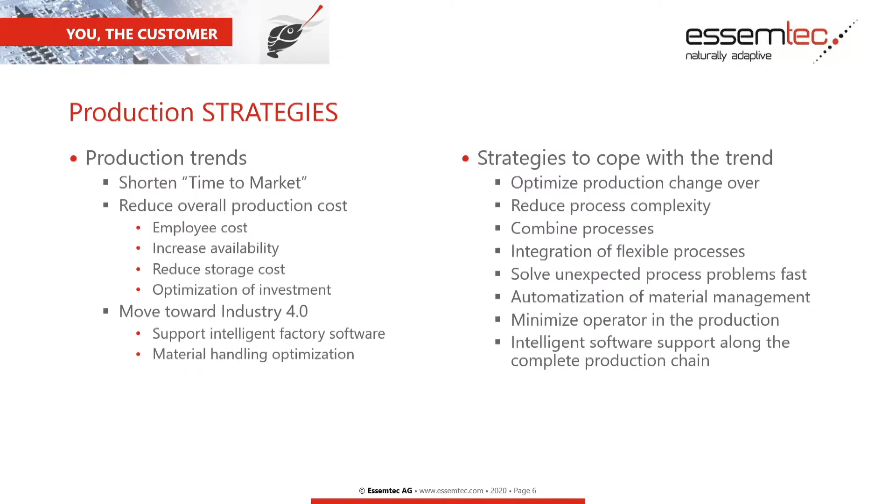Reduce process difficulty - today we still do things by hand, dispensing, etc. In the future that will not be possible anymore. Combine processes together, integration of flexible processes, solve unexpected things. That means in your production, when something happens, you can react much faster than today, and also be ready for future technology which will hit you.

So a partial solution to all of this can be dispensing. Dispensing is part of the solution for this new trend, and we want to talk about that today. What does dispensing bring you in combination with other machines?

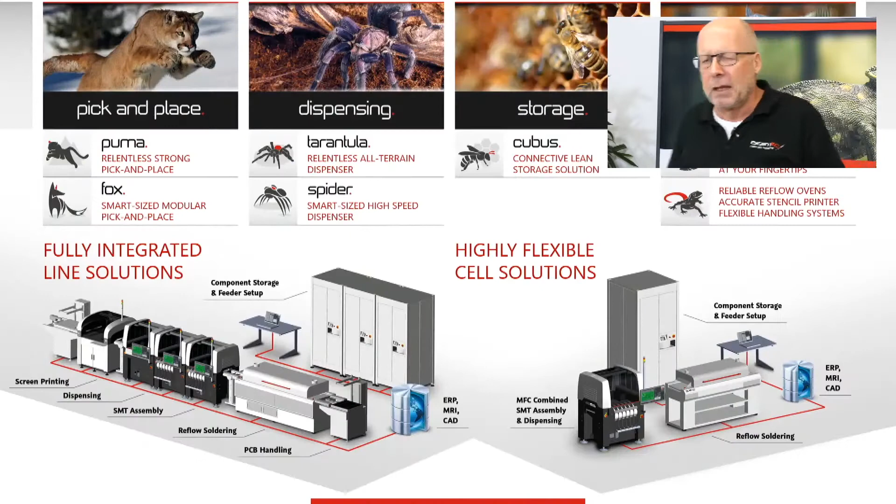Now, on Essemtec, we are actually handling different divisions. One is pick and place, one is dispensing, where we mostly work with very large companies, and of course storage and smart material management, which is a very big issue today. But today we want to talk about something in combination: the pick and place and dispensing combined together, and what it can do for you.

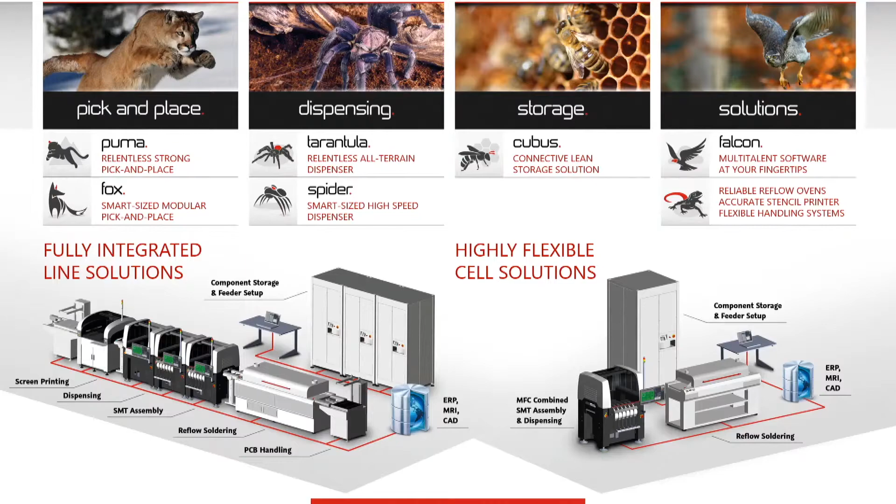We called this concept, this solution, Archerfish. I don't know if you know the archerfish. I didn't know it 6 months ago, but it's an extremely cool fish which actually shoots a jet into trees and bushes to hit down little animals, little spiders, etc. They fall to the ground for eating. This looks very simple when you see it on video, but the accuracy this fish has to achieve is incredible. And this inspired us for our jet dispensers.

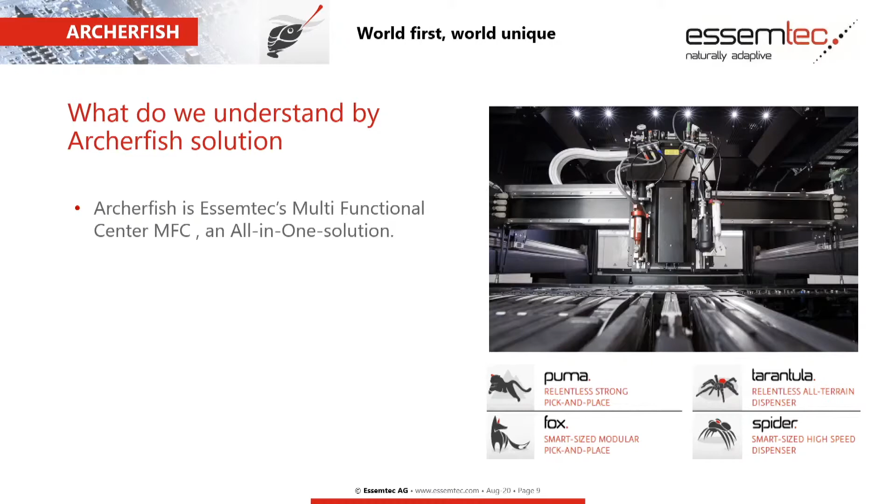So the Archerfish is basically the multifunctional center. Multifunctional means it's an all-in-one solution, meaning processes are combined together. Processes are combined in all our machines. So solder jetting, glue jetting, pick and place, underfill processes, whatsoever, you combine in one machine, or when speed is an issue, you take it apart, but always on the same platform machines.

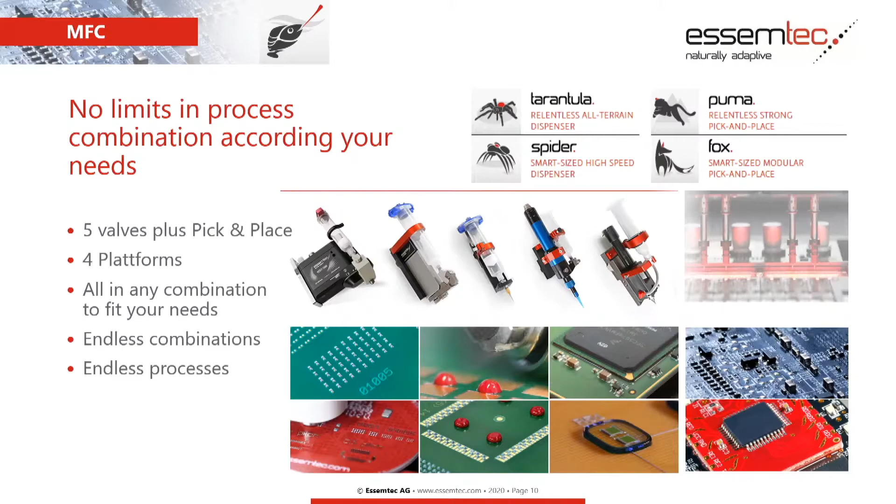Now let's have a look here. Basically, we are working with 5 valves, 4 different platforms, which are technology-wise the same, so that we can do any combination, endless tasks and endless processes. And it's really endless - in the last 6, 7, 8 months we've worked on at least 25 different processes with this tooling, because it's all a question of adaptation.

So what can we do? We are basically having 2 jet valves - one for solder and one for glue. And then we have 3 dispensing valves: one is a screw, one is a volume dispenser, and one is a time pressure, which we are not using much. And what we are covered for is underfill, glob topping, solder, the complete SMD spectrum, etc.

And we combine that together with a pick and place. Now, the question is, where is that used? It's used actually on the whole spectrum of production. We can start with, for example, a simple NPI line - one machine with a jetter valve for solder jet printing.

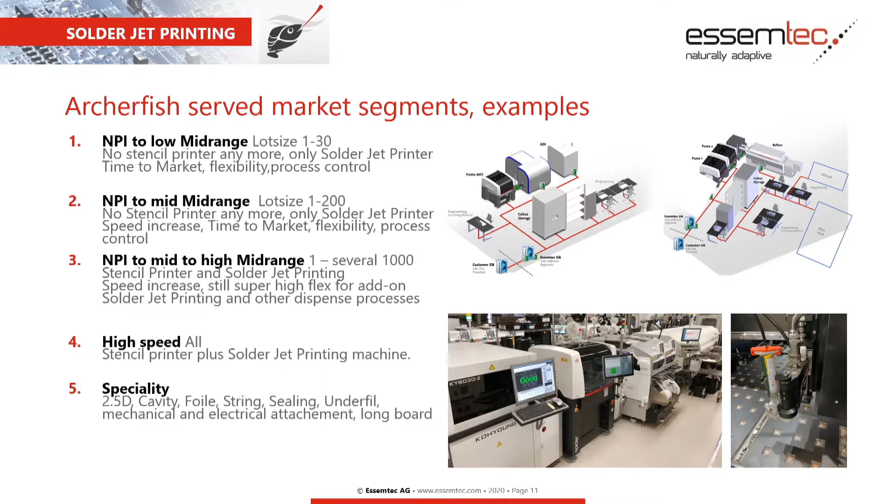And the pick and place, so all in one unit, and for example a vapor phase besides it. Of course this is not fast, but it's highly flexible what you can do. And what we also can do is that an NPI facility can change the valve and use the same machine for other applications they have to do.

Or we have already a little bit more speed. We have a pick and place, in front of it, combined with a jetter. Also there, no printer anymore - all in one.

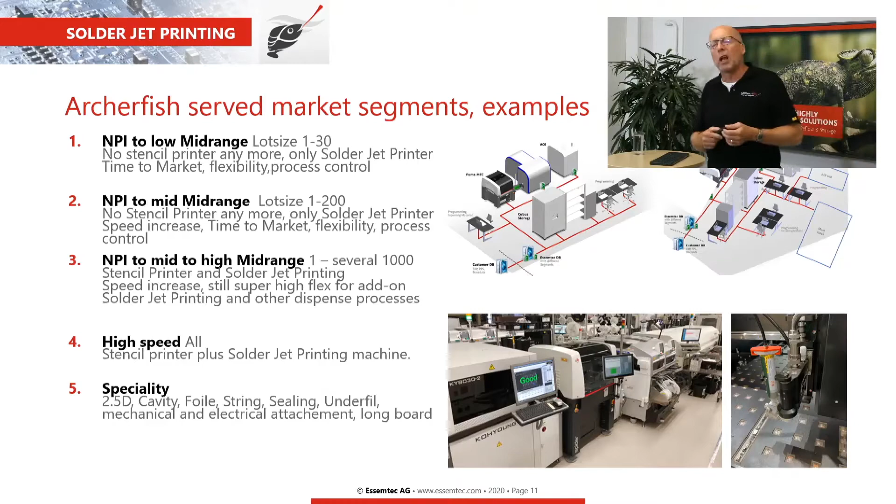Or on a mid-range, speed is higher - you have a mid-range machine, and in front of it you have a jet machine. You see that on the bottom. On the bottom, basically, that's a high-speed line. What we do a lot - I think it's a Fuji NXT in the back, and in front of the Fuji you see our dispense module. In this case, I believe it's in Hungary.

It's a glue application. And the very big thing on this dispensing is specialty. We are not only selling these machines to the electronic market, we're also selling to medical, non-electronic, and other applications which are outside of the electronic market. About specialty, I will talk a little bit later at the end of the session, where I give you one example.

Now, this is basically a head configuration. The Puma machine we will show you today has 3 positions. They can be freely set with dispensing or pick and place heads.

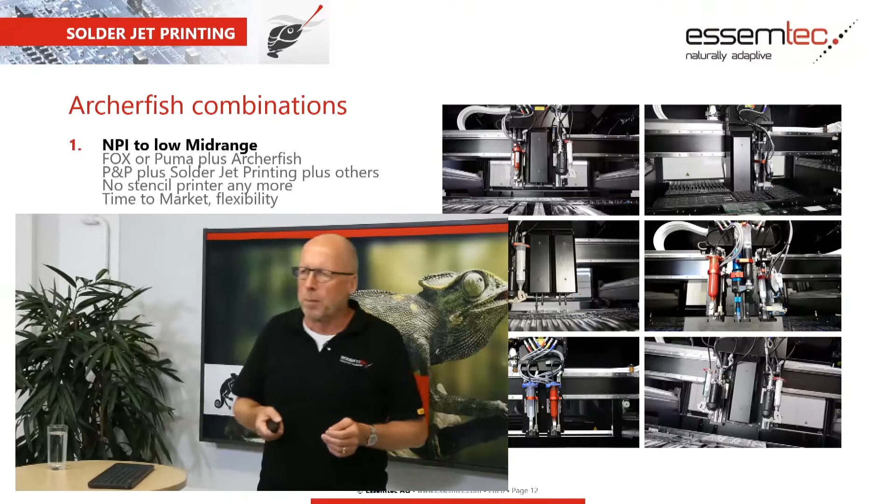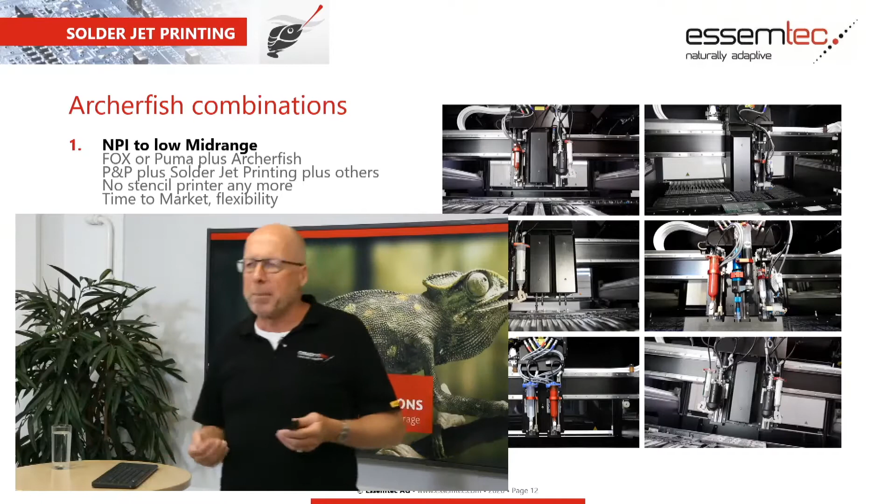So in the front, on the top, you have a typical NPI machine, meaning on the left you have a glue jetter, on the right a solder jet printing head, and in the middle 2 pick and place needles. And on the very bottom you have basically a high-speed jet dispenser with 3 different processes on the same machine. So this machine will be integrated typically in a high-speed line.

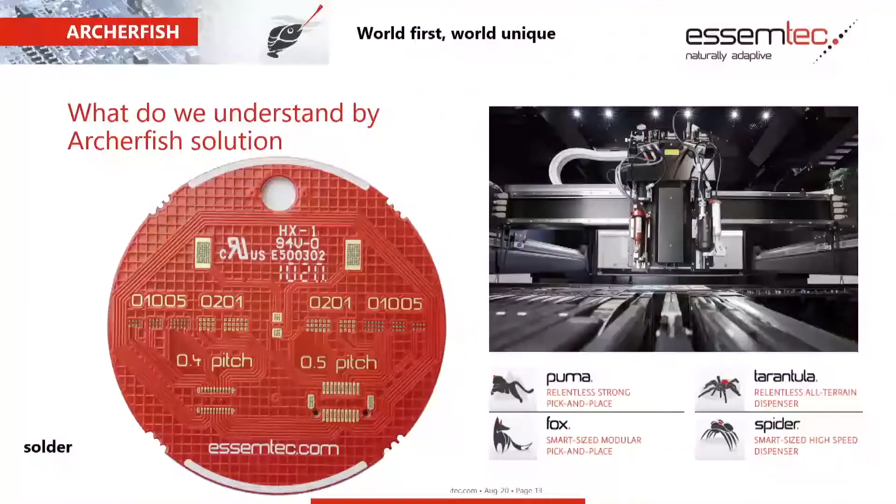Good, so to wrap it up - the first part, you get an empty board, you jet it with solder, you jet it with glue where you need it, hard to see, you pick and place, and your product is basically ready to go into the solder process, into the oven.

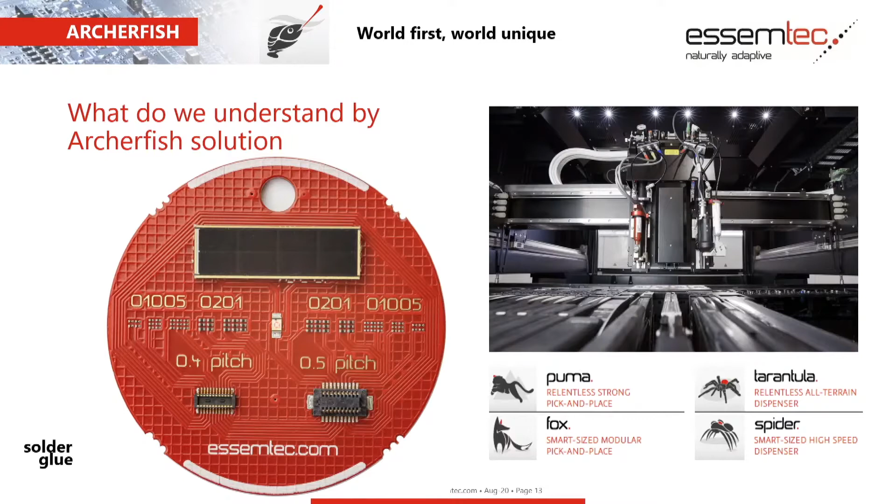Thanks, Jörg. So this is our Puma, and our Puma over here is equipped with two valves. This is equipped with 2 valves. How Jörg was explaining clearly is because that we are going to have 2 different processes. We are going to have a solder process and a dispensing process with glue.

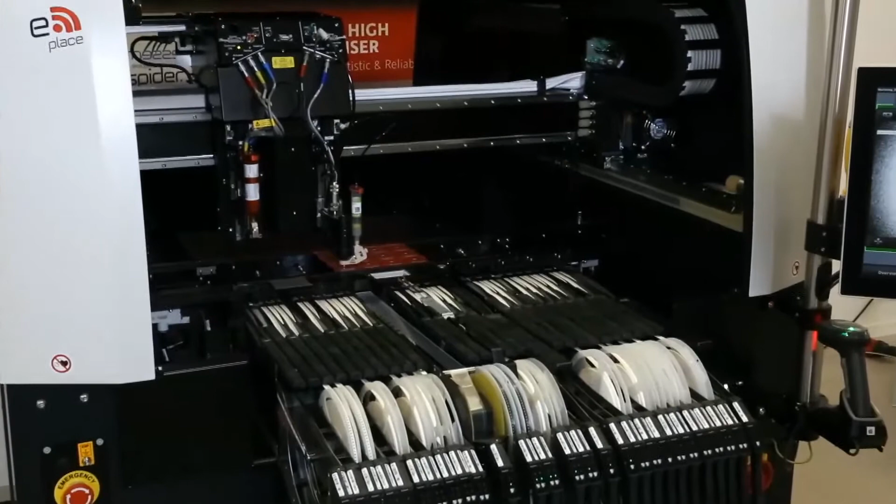So now you can see that the Puma is doing some test dots before we start, measuring the dots and going on action. So right now we have to dispense some small dots and big dots. And the settings that I have over here, it's only for small dot basically, but inside this PCB, what we have over here, we have different kinds of pads, where in this different kind of pads, we need to shoot more dots to simulate the printing process. So we need to put more volume.

So that's why, especially for the solar panel, I will explain later what we are going to place, that on the solar panel we need more volume on this particular pad. So now it's dispensing on the big pads right now. It goes on the 0.5 pitch connector.

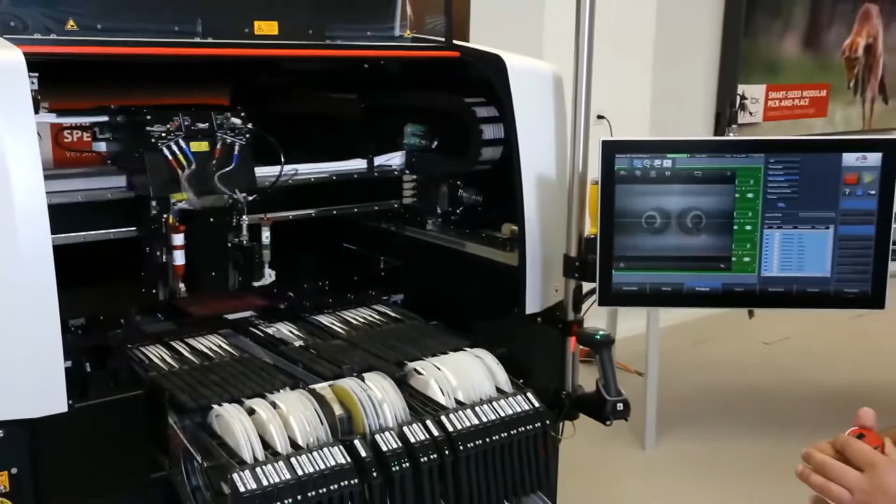Now after the 0.5 pitch it will jump and do the epoxy. Now we'll pick and place the 01005. So we are placing on the 01005. This is the smallest component right now, it's in the market. And as you can see, it's placing them quite nice, the machine. Now we'll place the 0201s.

After the 0201s, we will place the LED and then later on the solar panel. So this is one connector, second connector, LED and the solar panel. So what we have done over here.

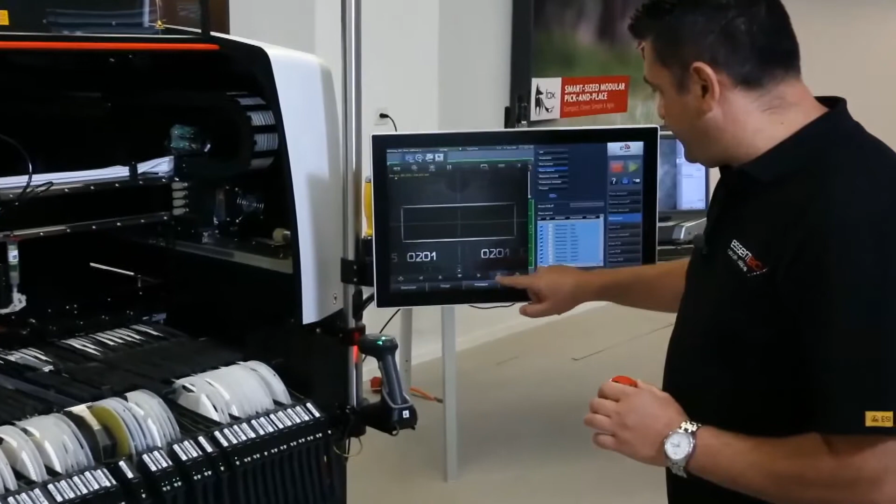So here what we have produced. This is a keychain which we already produced. So here it's the solar panel, where over here we have 01005s. Then there is the LED, which is powered obviously by the solar panel, a connector of 0.5 pitch and a connector of 0.4 pitch. So here you can see that the components are being placed inside our 0.5 pitch, which are here, and 0201s and 01005s, they are over here.

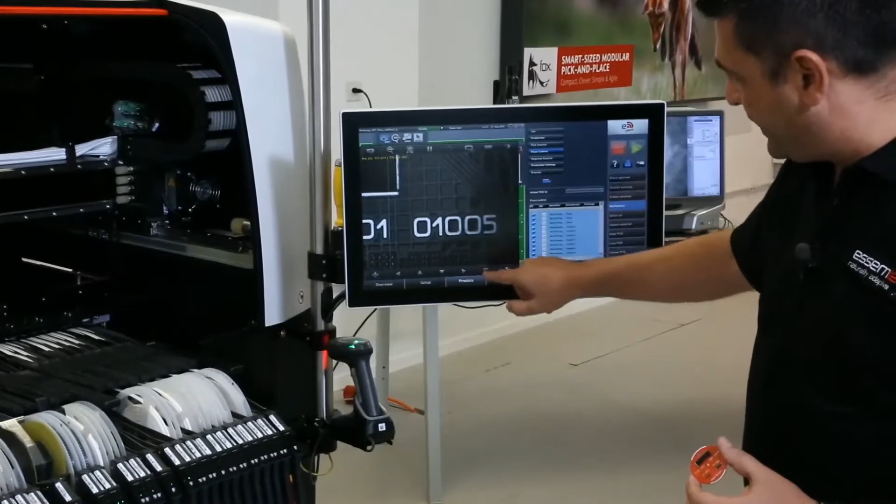So that's what we have placed so far. Now let's show only, because the main showing is on the Archer fish, which is our DST valve. Let's show and dispense only with the dispenser, and later on we will check it under the microscope, because the camera over here with the web camera might not be as visible as good as when we go on a special microscope. So now let's just load for dispensing only.

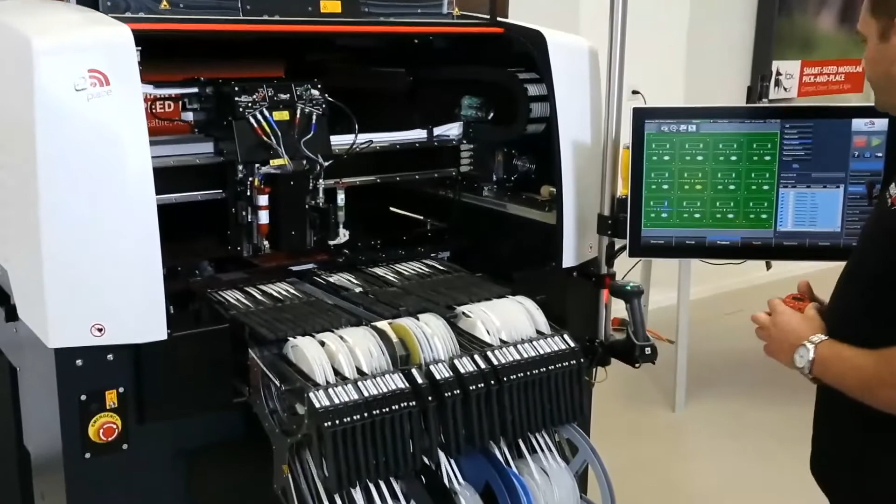Let's take this one. So the machine will do eye points measurements. Once again, it will do a process check before we start. This is the process check. It depends on the end user, so he can switch it on or off. For us, since we're doing a test and showing a test, we're showing that the machine can do a process check as well. This will ensure your quality later on, that your quality will be good as well.

So we are dispensing on the big pads, soon followed by the small pads.

So you see the two processes integrated together. As soon as the DST has been finished, immediately the glue took over to finalize the glue underneath. So when we place big components, it will be attached properly to the PCB. So let's unload our PCB, and we will take it on our microscope to see what we have done so far.

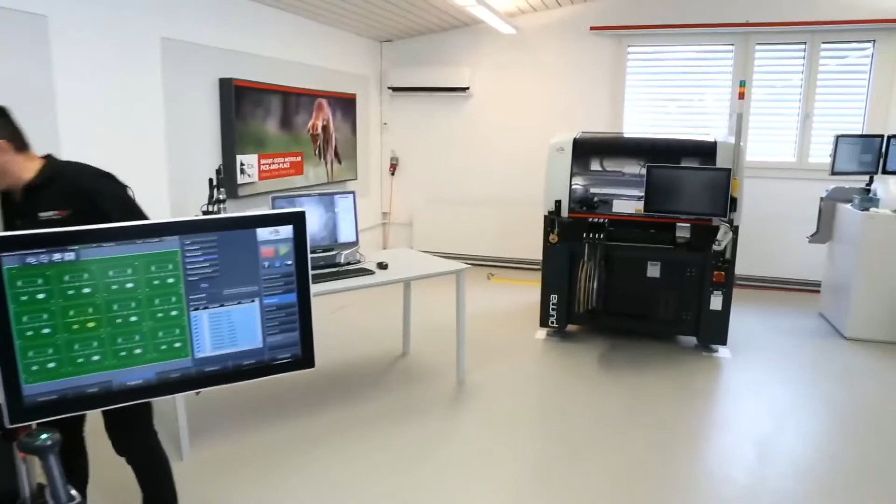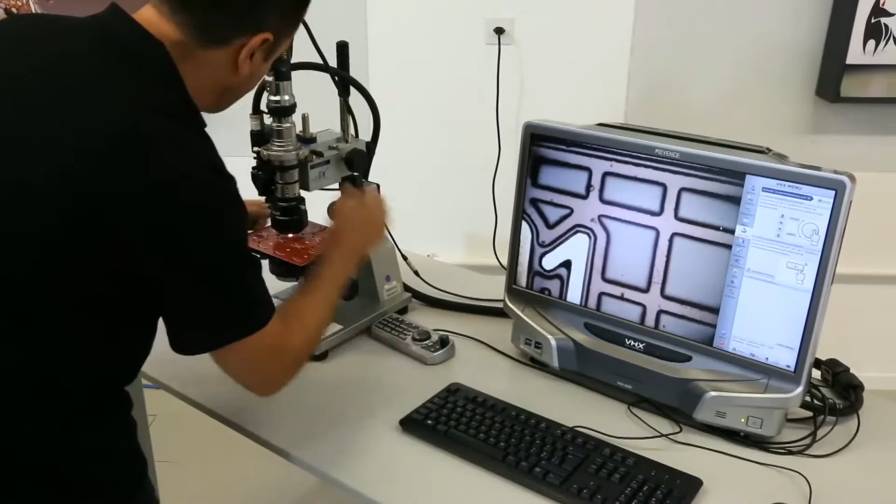Now we go on our microscope. We adjust the angle. So here, yes, we have the dots which are here, what we have produced so far. Let's focus a little bit. So these are the dots. Right, nice.

This is just to show you on the big pads, what we have done. As you can see on the big pads, we did a lot of dots close to each other. So like this, we can fill up a big pad much better. Now we go back.

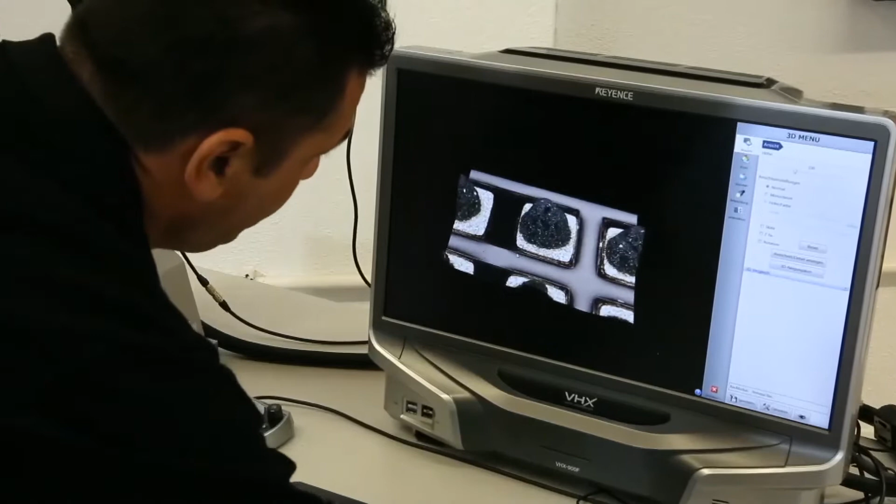Over here, so let's increase the zoom a bit. Let's take a 3D image. Yes, nice. So, as you can see here, it's a 3D image of what we have just dispensed.

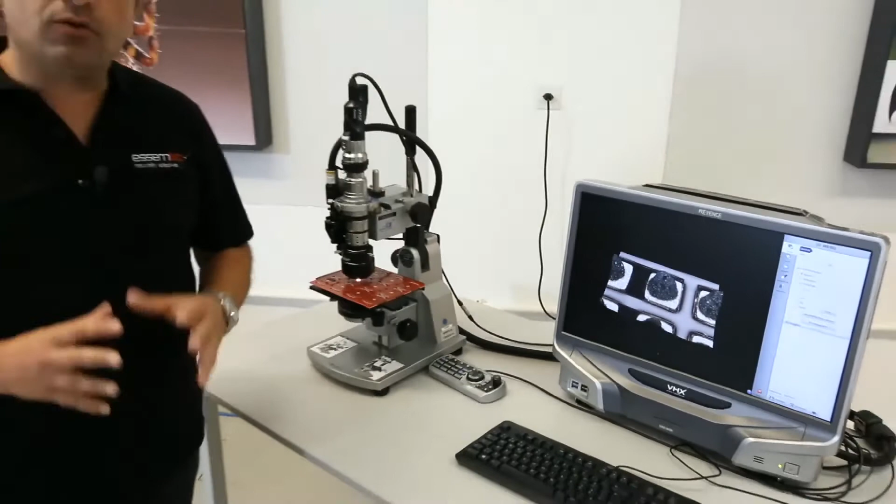This is around 2 to 3 nanoliters of volume over here. And one has to take in consideration that not only dot size is important, it's important as well the volume. The volume is very important, because keep in mind that once the solder goes inside an oven, the flux will be evaporated. So one has to keep in mind that just the volume is very, very important to our process. But here we are showing, which is quite nice process here, nice dot, that we had very nice dots.

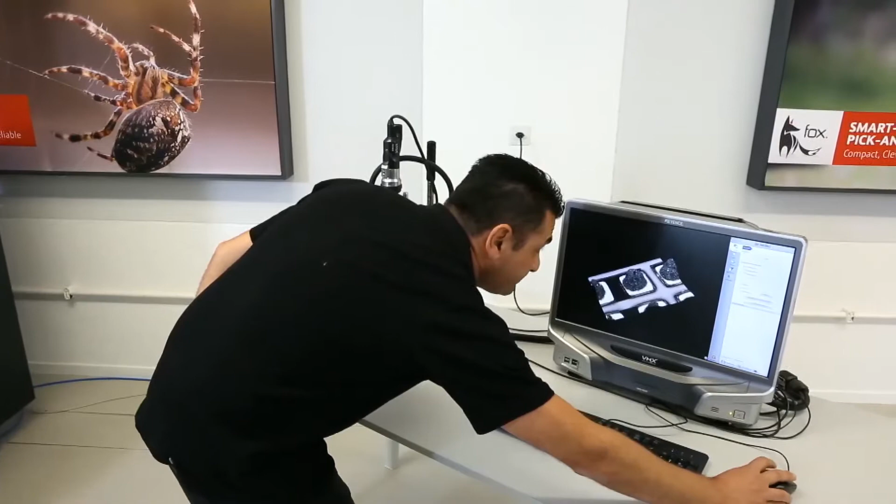And yeah, so let's continue on the machine, to see more capabilities of the machine, actually, what we can do.

And the nice thing, the one that we have done, I don't know whether you can see it, but the LED, it's already powering on over here. I don't know whether you are able to see it because there's less light since we're having spotlights, but it's powering on, which is good. It means our process is quite nice.

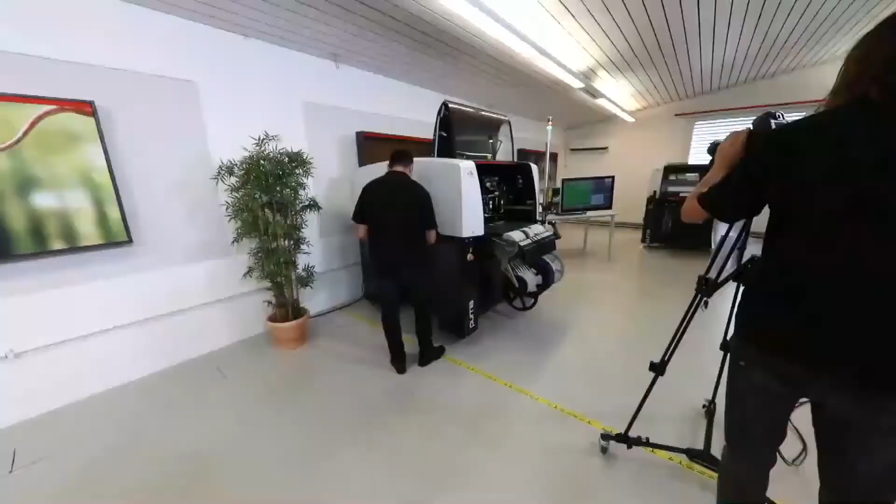So, coming back to my machine. Jörg was explaining clearly as well. Yeah, what we can do more with our machine.

Just to show you as well what we can do, we have the Gerber import. The Gerber import today is commonly used because most customers get files coming with only dispensing processes, where we have introduced our Gerber import directly on the machine. So once the customer has the file, we can just import it on our machine.

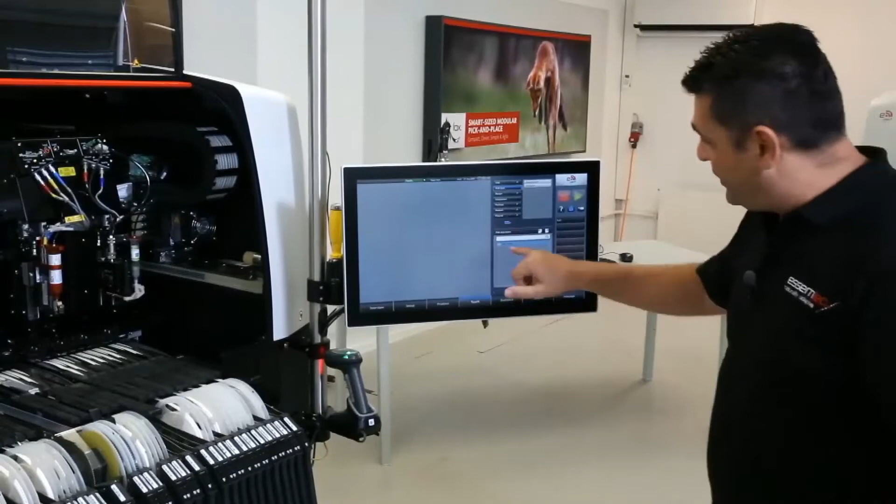I will show how easy it is to import a Gerber file and transfer it to a recipe that later on we can run in production. So let's see how we can do it. Imagine we have a USB or it's on the network, the machine. We have a file, we just load the file on the machine.

Now one has to consider that we have various layers. On a Gerber import, we have various layers, and one has to think which layer needs to go. Normally we will take the top layer. So voila, here it comes. This is our Gerber import and we have the top layer.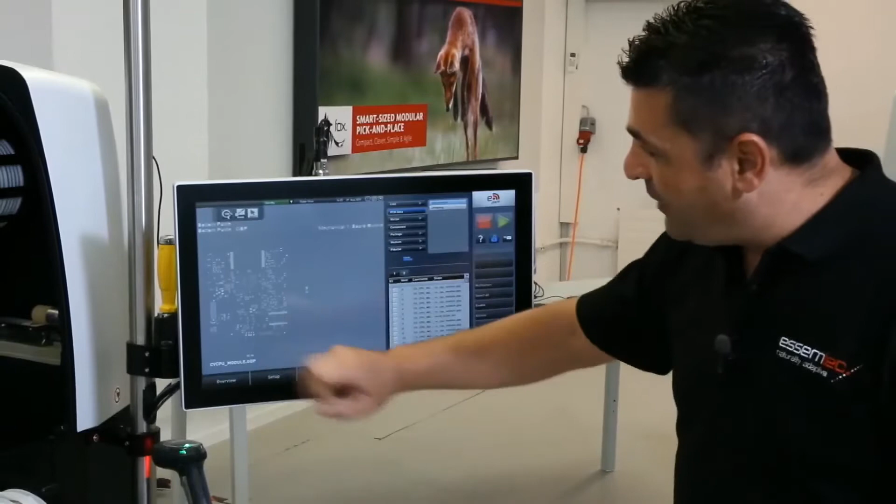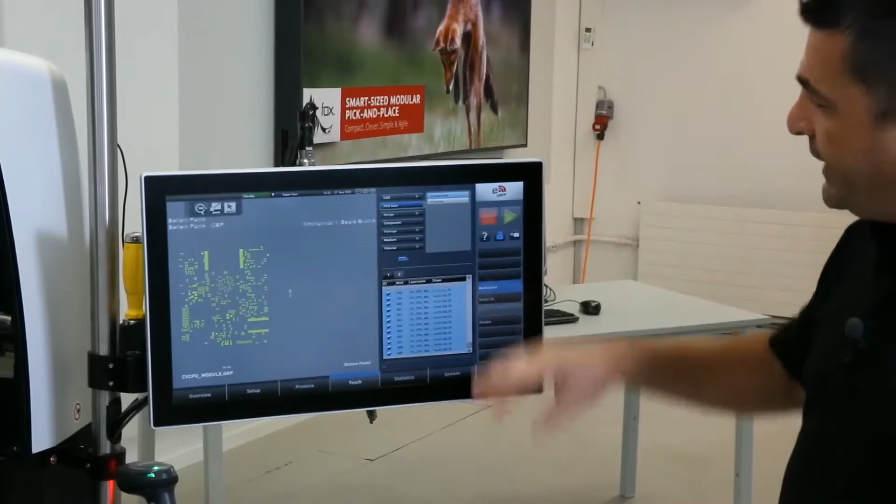Some layers can be defined from here. There will be other different layers. So let's select what we need. Let's assume we take this, because this is our region of interest, and we enable them. Now as soon as I enable them, it means later on we just need to group them.

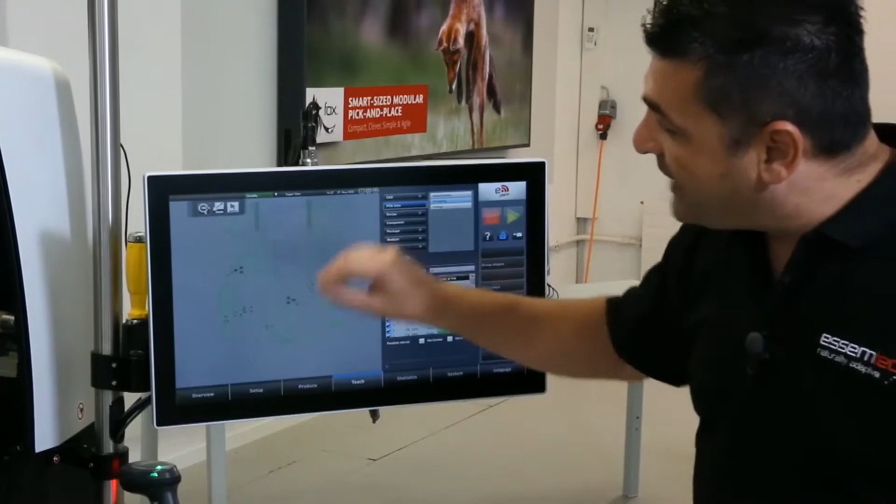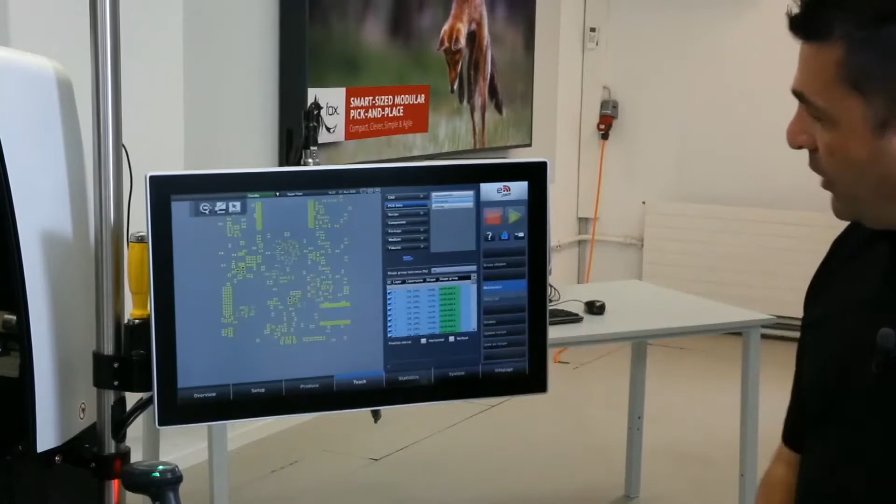As you can see here, we entered another menu where we are going to group different pad sizes right now. So for the machine it will be easier to calculate what kind of dot it needs to put inside. So I will tell it select all, and I will say group shapes. Big shapes go together, and small shapes go together. Then it will be easier for us later on for the filling.

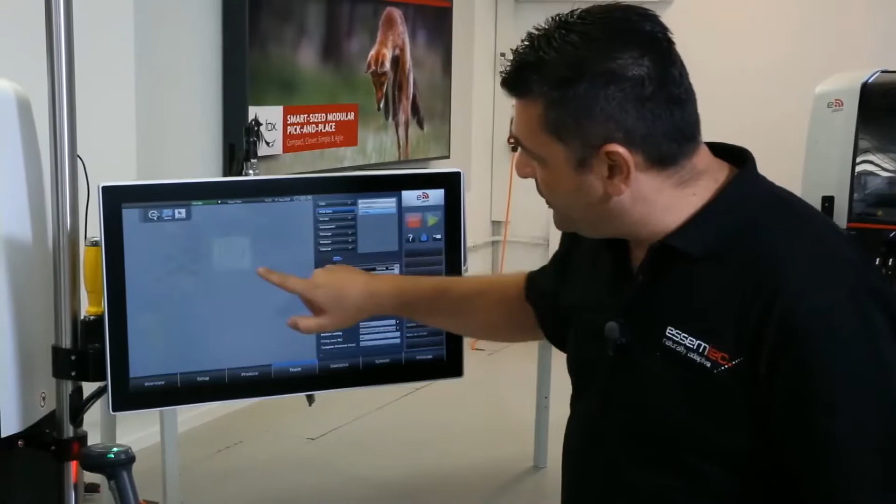So what remained now? Now we have to fill those shapes. So I will select all the shapes and just tell it fill shapes. Wow, good. So now as you can see, the system has filled my shapes, my pads, accordingly.

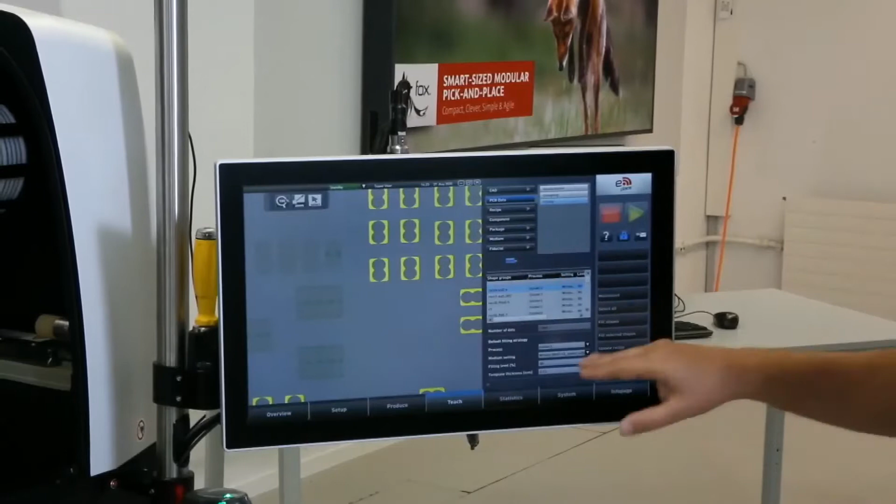So it tries to fill up as much volume as we gave it, to fill the medium needed. As you can see, for example, a bigger pad needs more volume, so it needs more dots inside it.

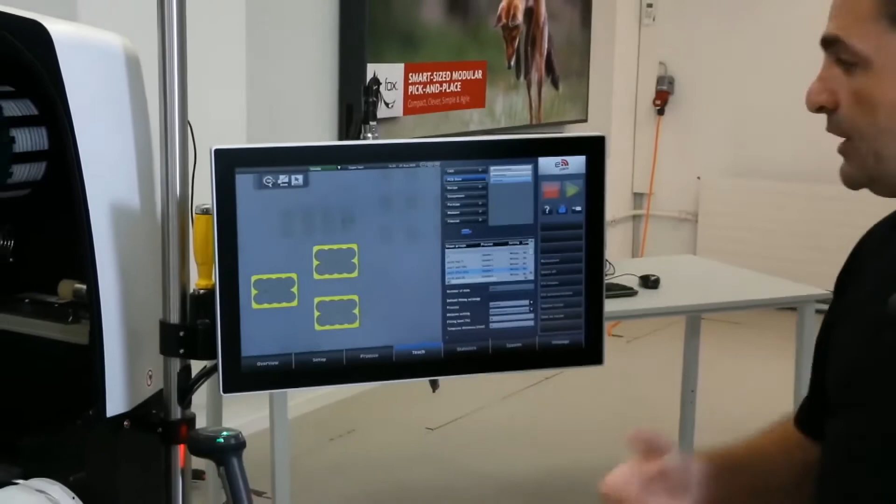Obviously we can do something to make it even faster. Instead of having more dots here, we can have another DST with a larger dot size, and like this we can dispense fewer dots for our application. But let's go now and I will explain how easy it is to change from a 200 micron dot to a 500 micron dot, for example.

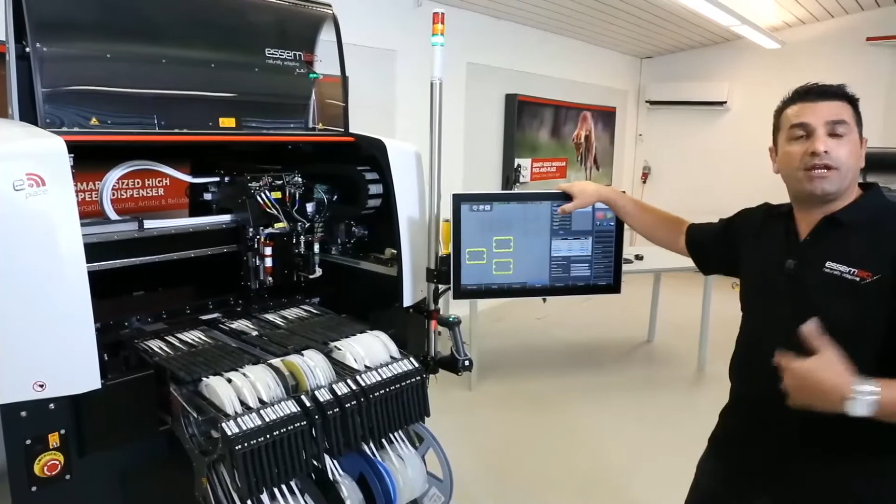So when you have something like this, this is the Gerber import we have done so far. And once I just press save as recipe, then it's ready and we can start our recipe. So Jörg, if you can pass me the, oh, thank you. As I was explaining, we just bring the machine off.

So this is the DST, what we mentioned. It's easy to change the fluidic. You remember before I told you that when you have a big dot or a small dot, you cannot run them together. What you have to do is sometimes you need to change the fluidic part. It depends - this one, for example, can take a dot from 200 to 400 micron. But if you need a 500 to 700 micron dot, you need a different fluidic system.

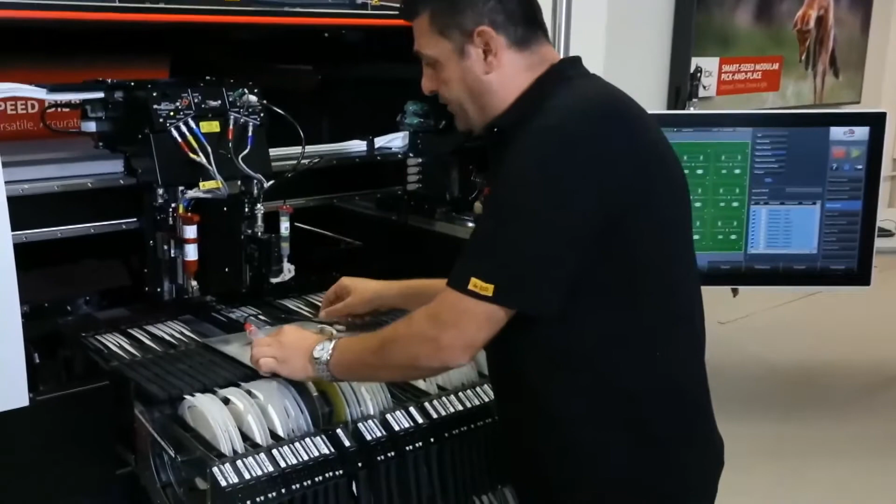And this is all what you need, and it's very easy. For example, this is to change the fluidic to a 500 micron dot. So it's easy, no tools required.

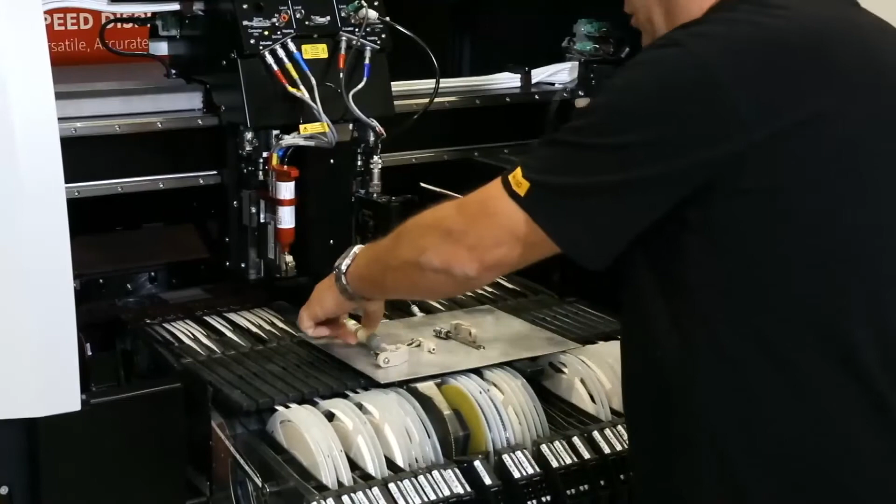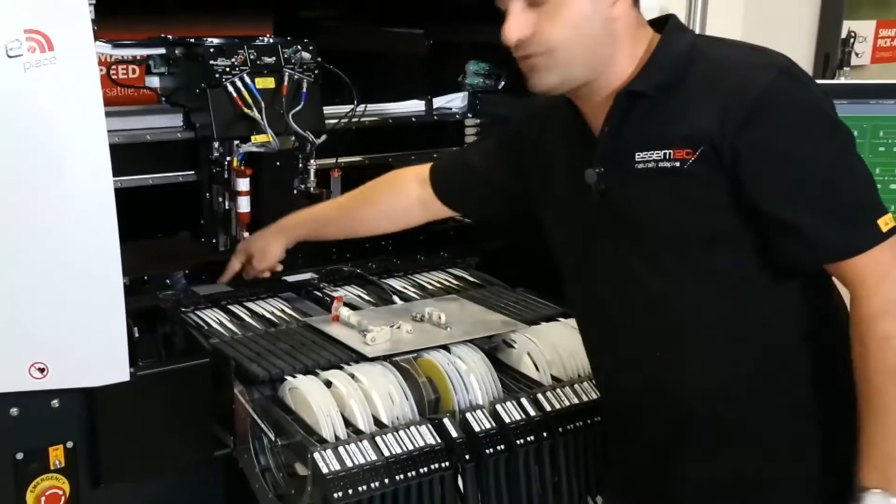So we just take the medium and it's out. Everything is on quick release, so it's on a special bayonet. Put the new one in, and it's done. All we need to do, of course, once we have changed the fluidic, is calibrate the Z height, and then we just do a dot over here, which is everything done automatically.

We do a dot over here, where with the crosshair of the camera, we align the dot accordingly. We will show it later on as well.

So let's go back now and change back to our fluidic system. I might need to change back. How easy - pipe out, fluidic out, take the other fluidic, plug in, and ready. Now some people would tell me, oh, but you need to clean it. Yes, you need to clean it, it's true. But don't worry, you don't need to clean a lot of parts.

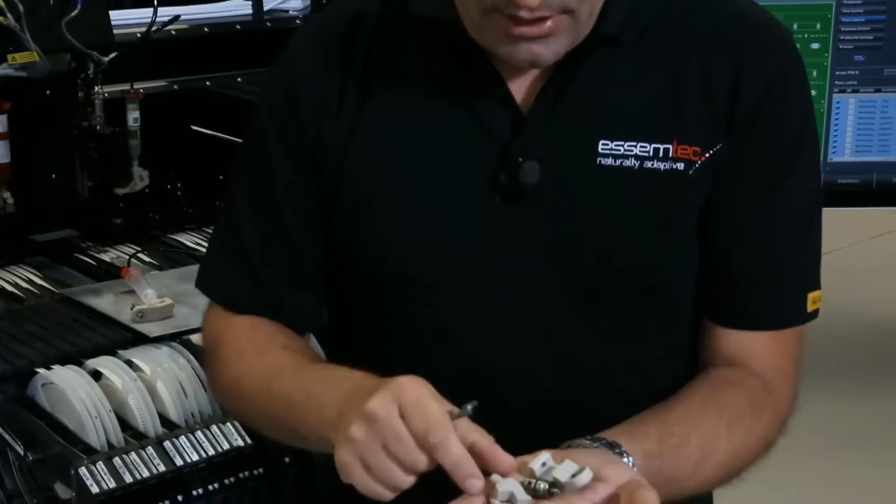This is the only part that you need to clean, actually. Here I prepared some parts which you need to clean. As you can see, with just a simple spanner, these are the parts that we need to clean. This one, we don't need to clean. But these are the parts that we need to clean. It's very easy to dismantle, very easy to clean, because the ports are not so small, and very easy to handle and mount everything back.

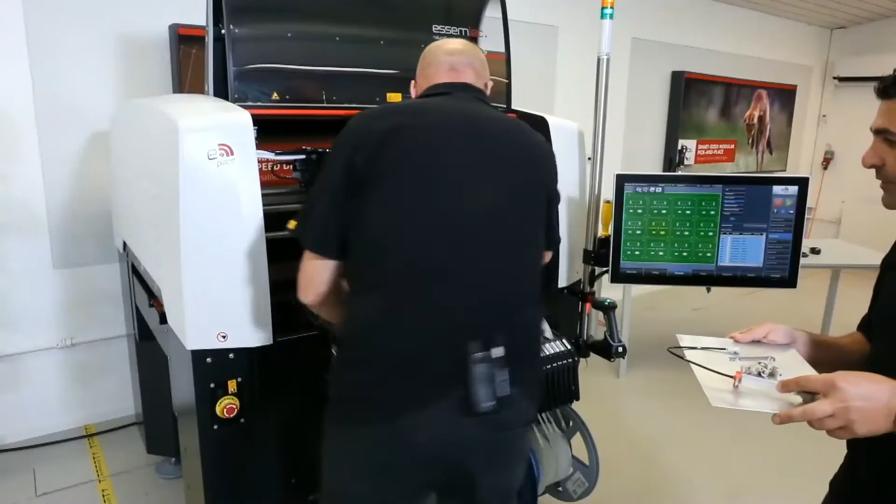So I will pass these a little bit to Jörg first. Now let's show you the capability of our machine, what we can do with it.

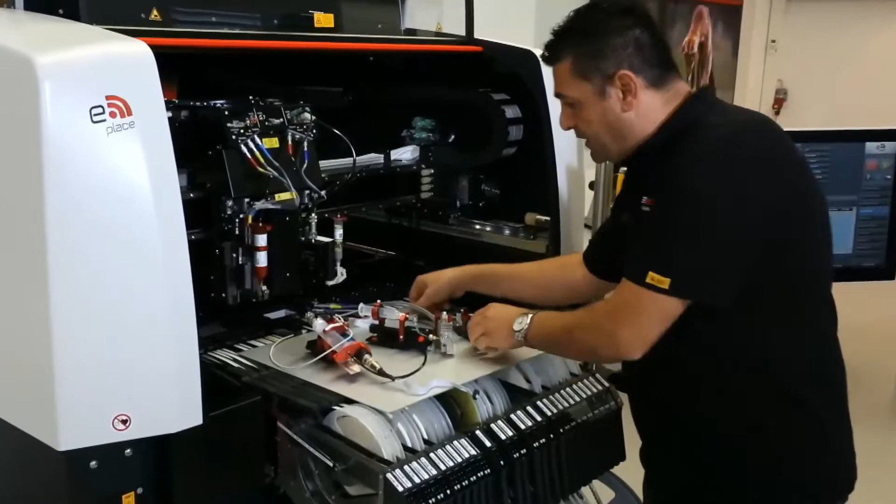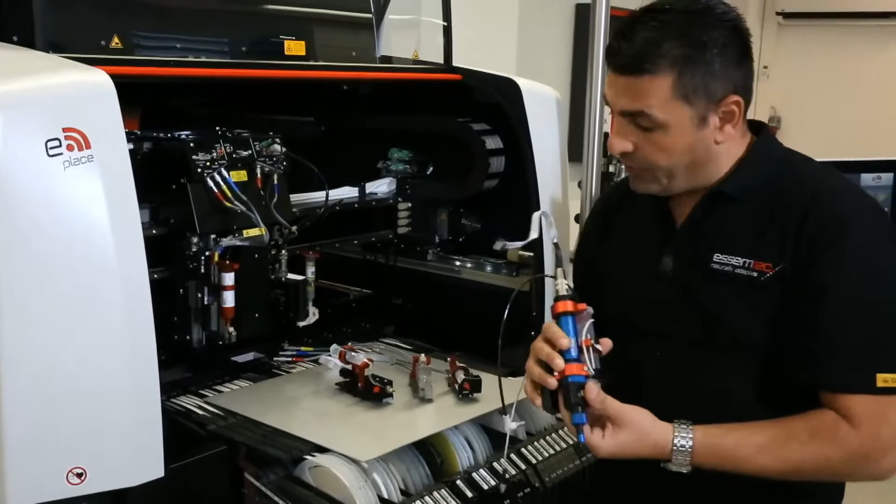As Jörg was explaining, the machine can handle various kinds of valves, and the valves are easily replaced. I'll show later how to replace a valve. For example, this is a time pressure valve, where you can mount on every axis you want. Then we have this one, the high volume valve, good for somebody who wants to do a gasket to seal or underfill or whatever — keep in mind we are not only in the electronics industry. This one is for high volume, sort of a gasket.

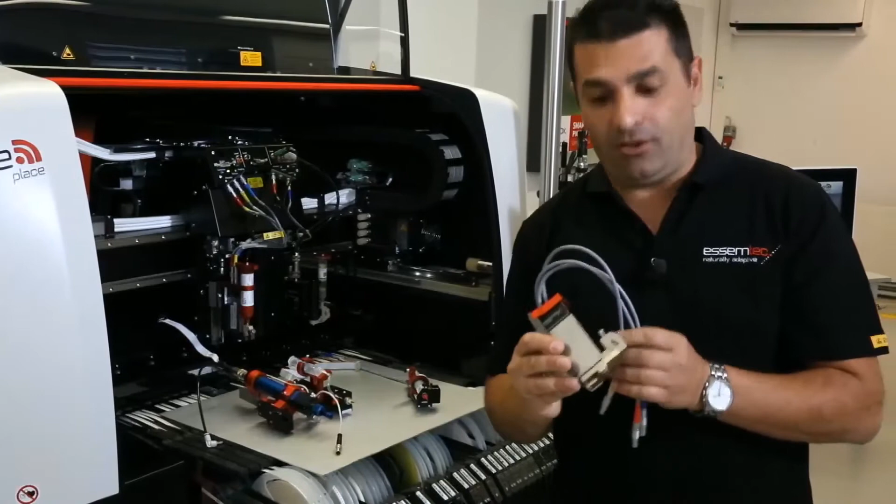Then we have this one — I love it actually because it's fast. You saw it in action. This one handles a lot of glue, very good, and very, very fast. It's a jet valve as well.

And last but not least, that one I personally like. Why? Because it's flexible. The speed is not as the DST or the glue valve, but it's very, very flexible. This is our micro screw valve.

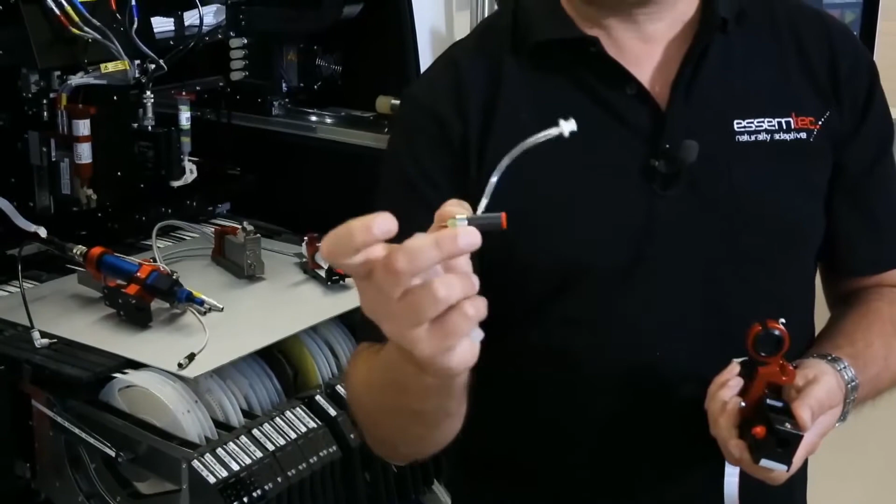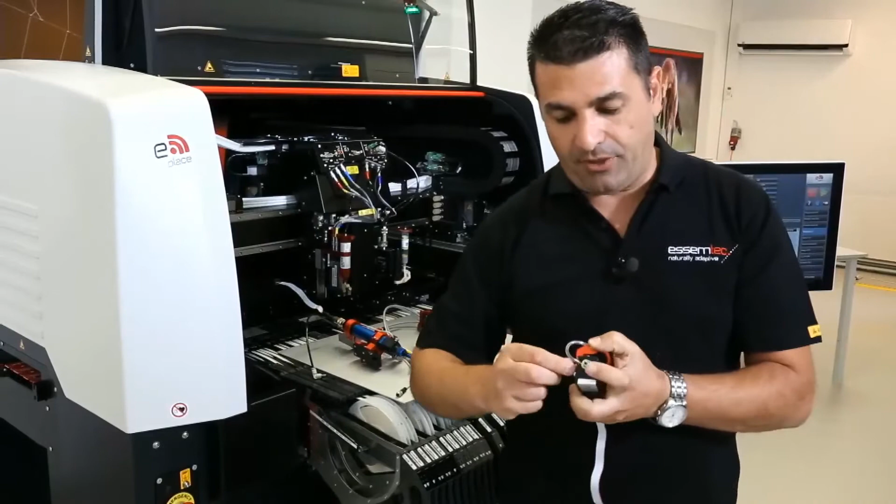Some customers are afraid of the micro screw valve, but I will tell you that you don't need to be afraid, especially on the cleaning, because the cleaning part of our micro screw valve is just this small part here. All the other parts, there's no need to clean, which is nice. So let's mount it back and try it on the machine, to show you how easy it is to fix a micro screw valve compared to another typical valve.

Let's put this one back. Now let's take this one — we're going to remove our DST valve. We take only the plugs out, and the connectors are quick release. As you can see, the DST is out. Can you hold it for me?

Now we will plug our micro screw valve in. And it's ready for action. Once again, it's ready for action. We need to calibrate the Z height, and we need to calibrate the dot position with our crosshair. But as you can see, it's ready for action.

Now let's put it back and see the calibration of the dot when we replace a valve, so one can understand better. So in the meantime, yes, thank you.

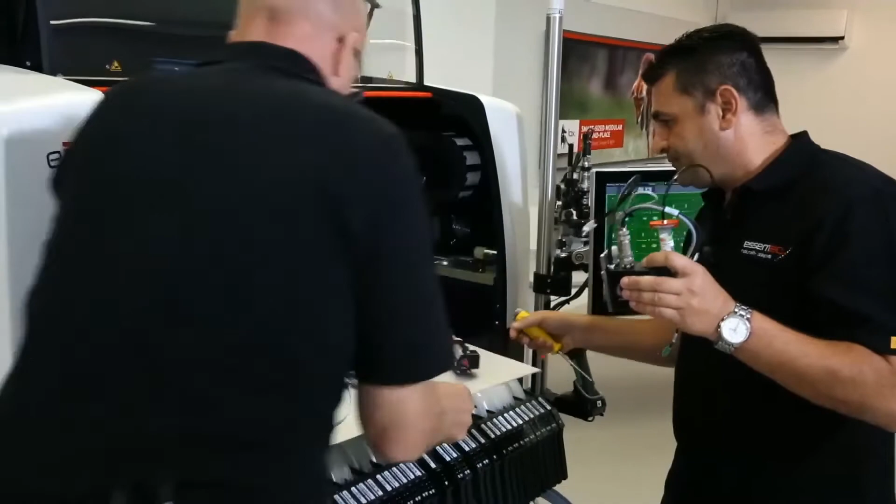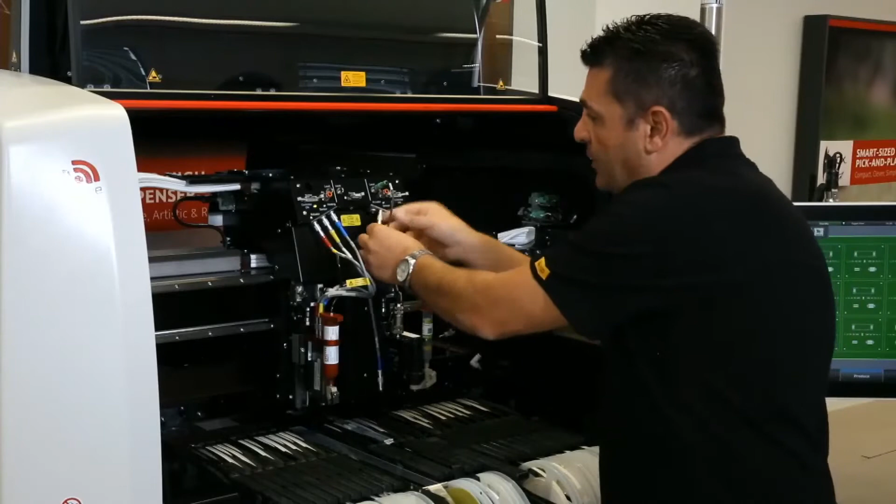So we put back all our cables, and the cables are very easy to handle. Why? Because they are all quick release and nobody can make any mistakes — the red goes to red, and they have a location where to go. The blue goes to the blue, and for example over here we have the yellow, it goes yellow to yellow, and we just connect the pneumatics. So our DST is back in its place.

Let's calibrate the DST, so we see how we can calibrate our DST now. So we take the DST, calibrate — here I'm going to show you what I was explaining, doing a teach Z height. It's a physical touch. And then, right now, it's waiting for the heater, the valve, to get to the ready temperature for this one.

As you can see, the machine, after I did the calibration, checked itself — checked the dot 10 times and confirmed what I did in my calibration, then optimized it to make it even better. Why? Because on the 01005, every micron is a little bit more crucial. So like this, we have shown that our teach goes well.

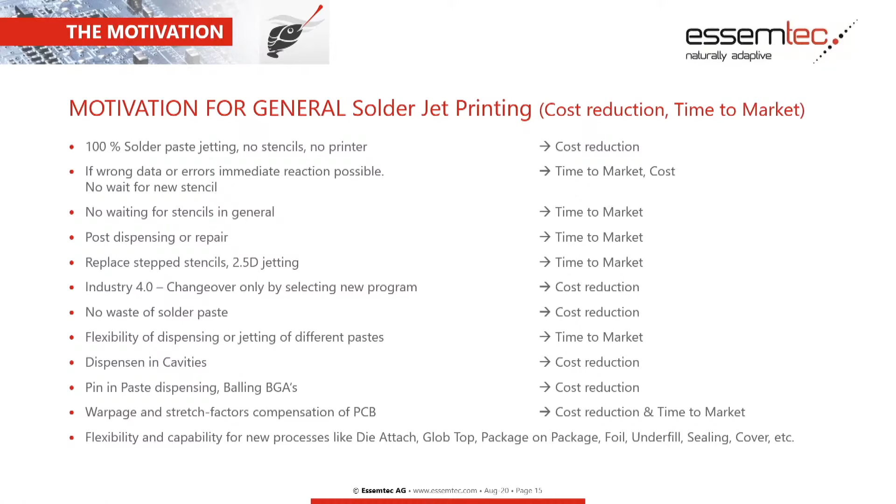Another possibility is for repair, and it's not only about missing dots in a process. It could also be, for example, a fully populated PCB where you need to place new components on it, so you can put our solution into the machine, jet the needed paste, and place the new component on it. Another nice and interesting use is the possibility to dispense and jet into cavities, which is very special and often needed for special products.

Okay, let's go further. The valve itself uses a so-called DST technology, dynamic shockwave technology. The actuator is pneumatic with an electronically controlled stroke. The heating is integrated within the valve itself and is controlled by our software, and depending on the paste and process we're using, it is saved in the recipe.

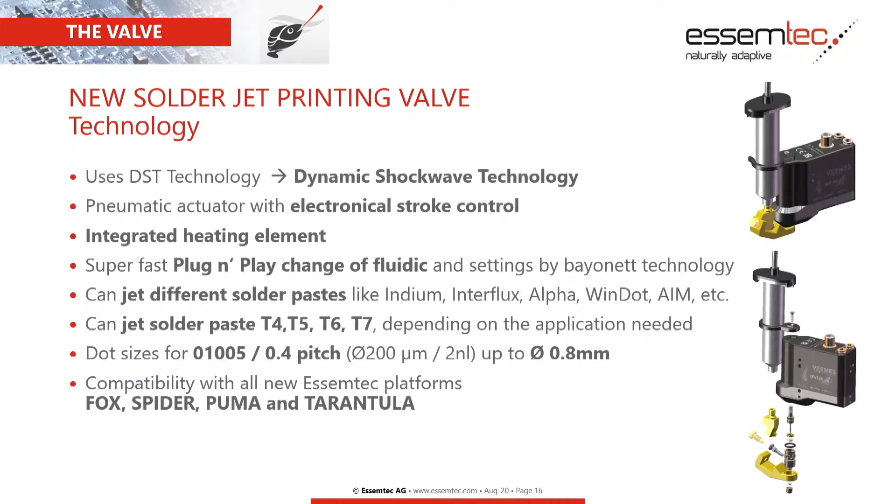The dot size can vary with our system from 01005, 0.4 pitch, up to 0.8 millimeter. In terms of volumes, since we also like to talk about volumes when it comes to soldering, it's from about 2 nanoliters, the smallest we can jet, up to 60 to 80 nanoliters. Everything is possible with this valve and our system. The compatibility of this VDST is with our newer platforms.

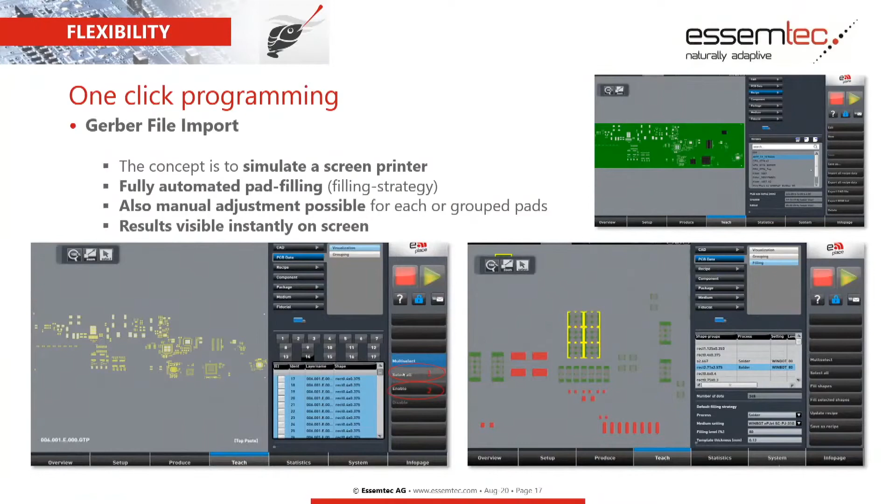Now we're going to go into a bit of the Gerber file import, as Kevin told you and showed you on the machine. The idea behind this software concept is that we simulate a screen printer — everybody knows how a screen printer works. So programming that into our software and doing adaptations is quite easy. If you know the process of a screen printer, you can handle it very easily also in our software. The pad filling is automated, and you can also decide what kind of filling strategy you want to have.

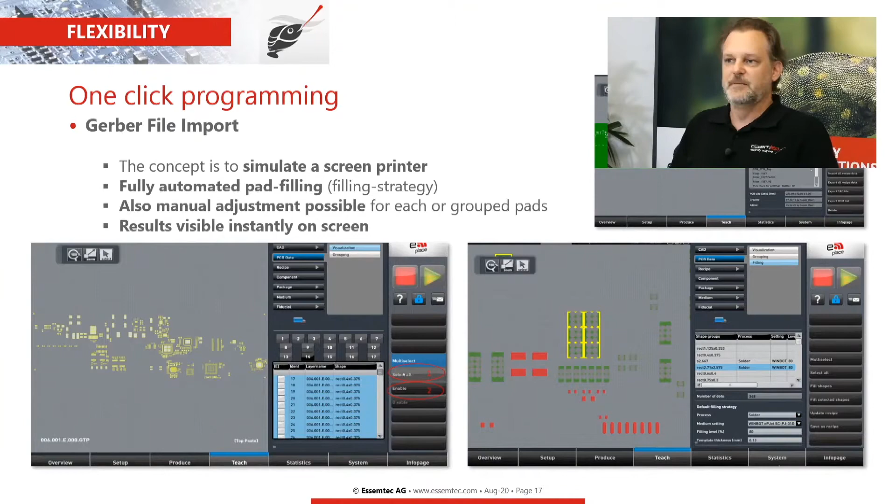It's possible to adapt either multiple groups of pads, for example for special component groups, or you can also modify single pads. You can add dots, take out dots, increase or decrease them, and create forms which maybe you don't get from the Gerber file. With that possibility, you can solder later on very special components which might not be that easy in a standard process. Everything you touch and change in the software, you will see right away on the software screen.

Everything we're explaining to you here, we also have on paper. Since there are many solder paste vendors and jettable types on the market, and we have different needs on the PCB side, from very small components, 01005, 0402 pitch, up to 800 microns.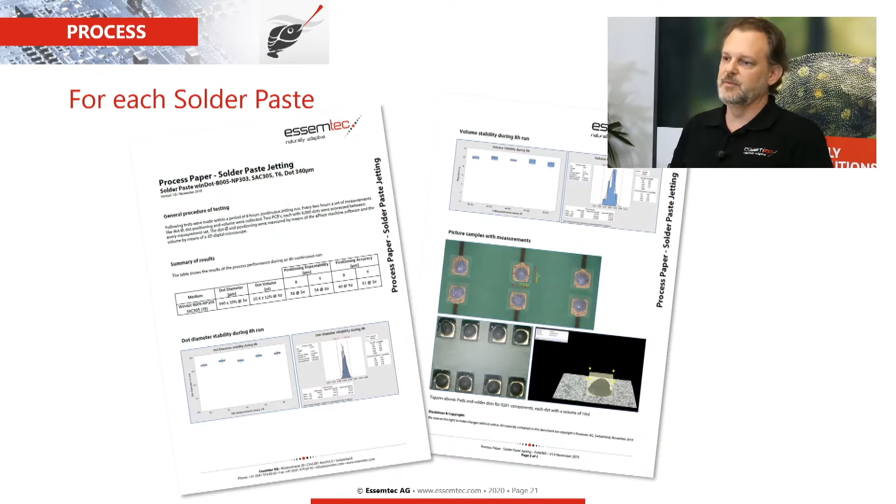We have defined 3 different settings, and with each setting you'll have a combination with different pastes. All this has been tested at our house in our department, so we know what we talk about. We have the statistics, the accuracy, the volume, the repeatability, and so on. We have much experience here, and this list is actually growing because more and more pastes are coming into the market. So for each solder paste and application, you'll get a process paper, available so you have more information about the process.

Now just for an overview about our valves, a bit of repetition here again. We have 5 main valves that you use. First, the time pressure valve, for medium speed, rather for medium and high volumes, for medium viscosity. Then we have the screw valve, the one our Kevin likes the most, because it's very versatile. It's not a fast one, but you can do special stuff with it, go into cavities, and use it for almost any kind of medium, so its application is very wide.

We have the volume valve, which as the name says is rather for larger volumes that you need to dispense within a short time. Then we have our highest speed piezo jet valve, which we use mainly for glue applications. And then the one we just showed, the VDST, our solder paste jetter for solder paste.

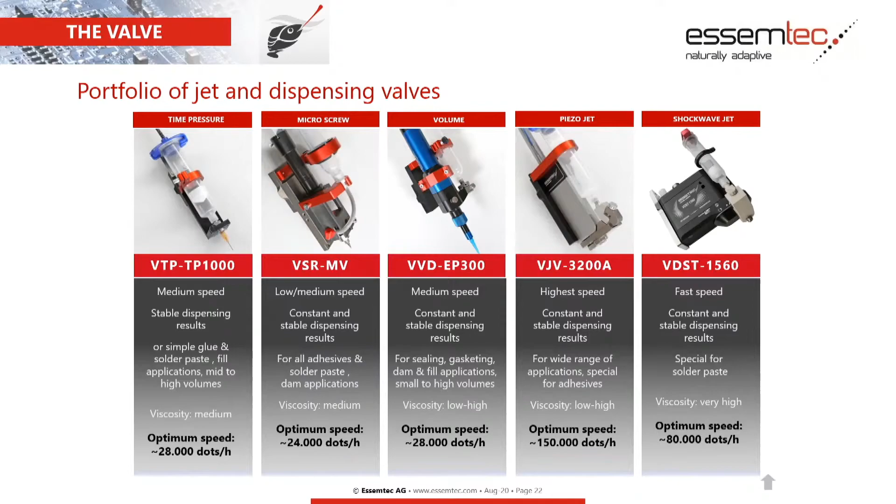Good, and I will hand you over now, Jürg, again. Thank you very much. Thank you, Fernando. So I think we still have some people online. I hope you're still with us.

Now we want to quickly show you 3-4 case studies, and then we will come to an end. Let me show you quickly the company iNES, a very small company in Germany, doing their own products, but also products which need a lot of development. So NPI, time to market, is important, but they also have products with larger volumes. In this machine you see here, it's our smallest one, the Fox.

It does dispensing, solder, and pick and place. This was filmed when the installation was just finished. Today, this machine has a loader and unloader on the left and right, and the CEO you see here is actually running the machine himself. So that's how easy it is.

But he actually goes then to his office, and this thing is running completely independent. When something is going on, he gets a message on his screen that he maybe has to refill something or similar. So that's basically really Industry 4.0, because it's independent, it doesn't need any people around it.

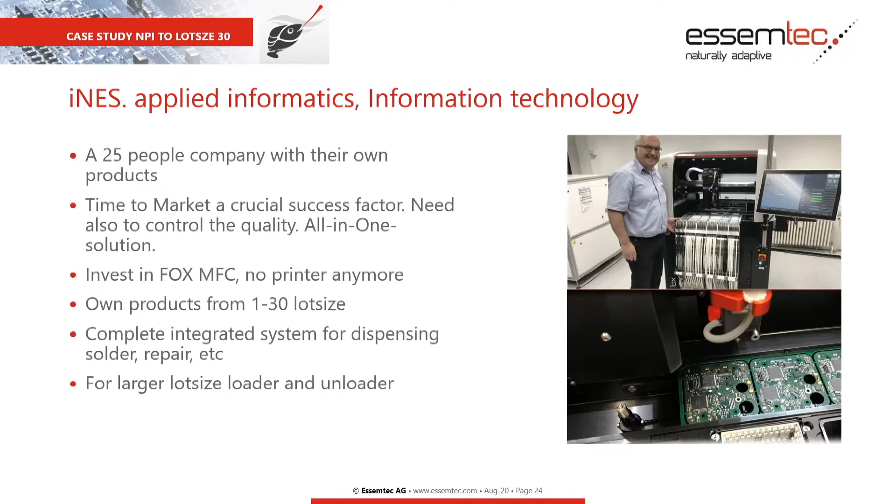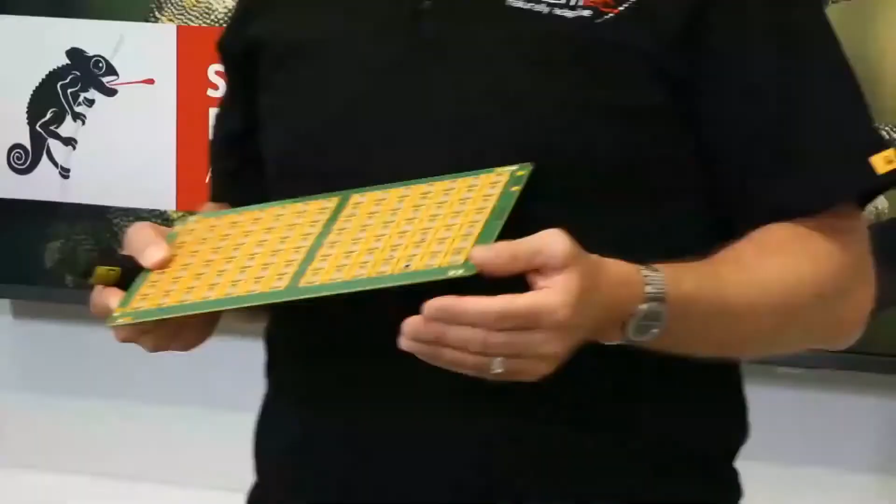We have Rohde & Schwarz, which is a rather larger company from Germany, international. We have dispensers in their Czech plant and in Memmingen, close to Munich. They basically bought the dispenser to learn, for their very complex, huge production, where they could implement this technology. One example they had here is a cavity board. We have 0201 components down here, we have to jet into the cavity and place, and in the middle is basically a bare chip.

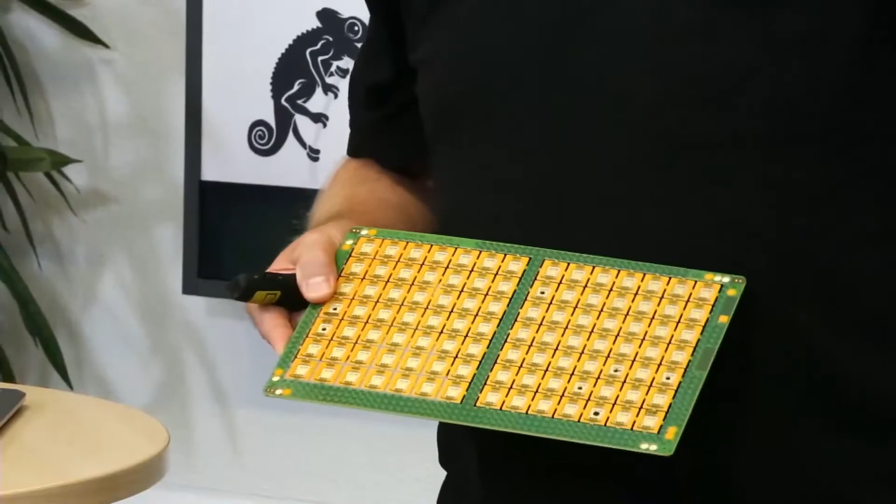Cannot tell you for what the product is, but I think it's something up in the sky, or high in the sky. So they do all kinds of variation on their machine.

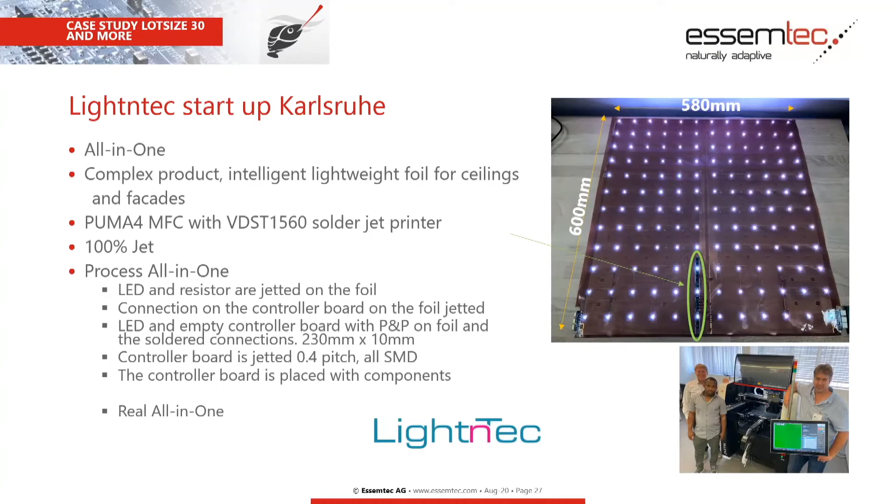This is a very cool example of what you can do in combination. This is actually a very large sheet of foil. The product is basically for walls, ceilings, outside walls on buildings, to have light, video clips, etc. So what we're doing here is the production has a cover plate over the foil in the machine to hold it flat, and you have cavities where you jet into the cavities and place all these LED components.

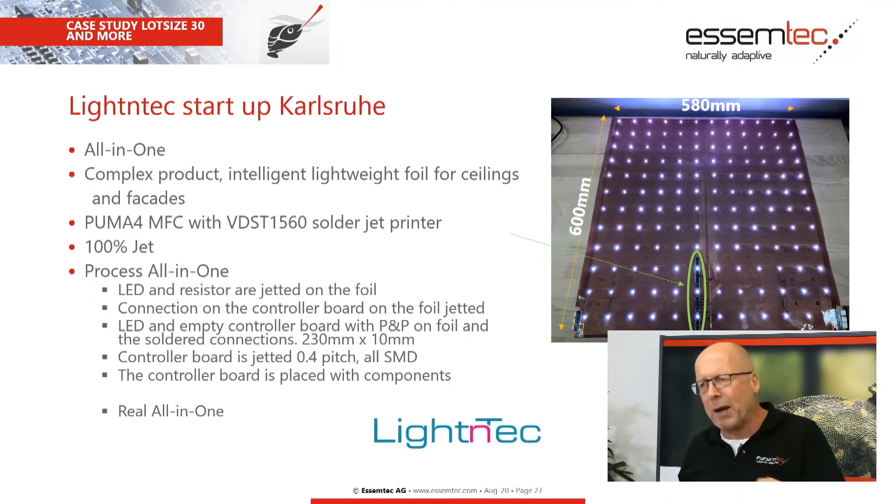All right, we did that, it was pretty easy. But then they came to us and said, okay, we're not finished, you have to place this component. As you maybe can see, it's a rather big component. Here it is, okay, it's actually a board - the driver board for this component. So what have we done?

We tried actually to place this huge thing with the machine like a component. Very risky because it's heavy and very big. So we changed the production. We said, all right, let's jet and place all the LEDs, let's jet all the connections, which are a lot down here on the foil. Take the bare board and place it because it's not so heavy, right? Then jet the bare board - it's 0.4 pitch, a lot of components on it. And then place the component, and then you have a sandwich, so to speak, and you go into the oven.

So of course this is only possible with really high advanced jet technology. But it was a very cool project, and honestly, we needed also some process experience together with the customer to finish that.

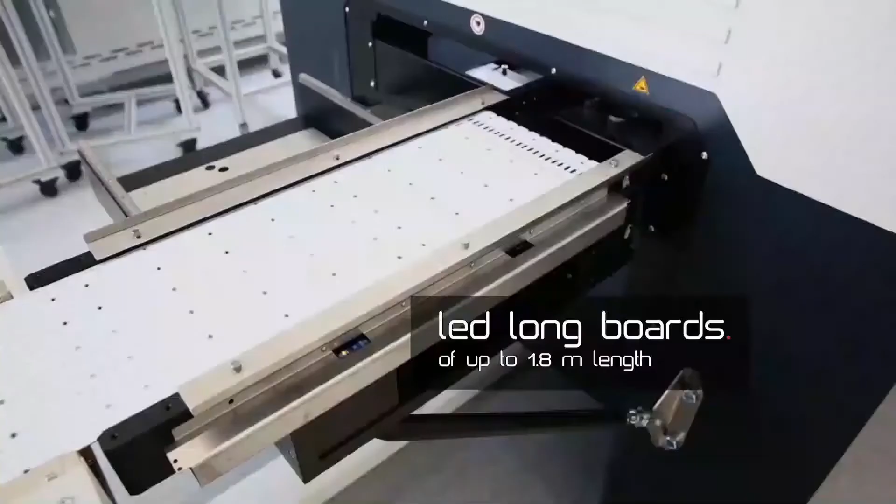I'm not sure, yes we have a video. I think it's 1.2 meters, this one here, or 1.5. So it goes to one side where it jets. In the middle, it's already printed, right? And then places the respective components.

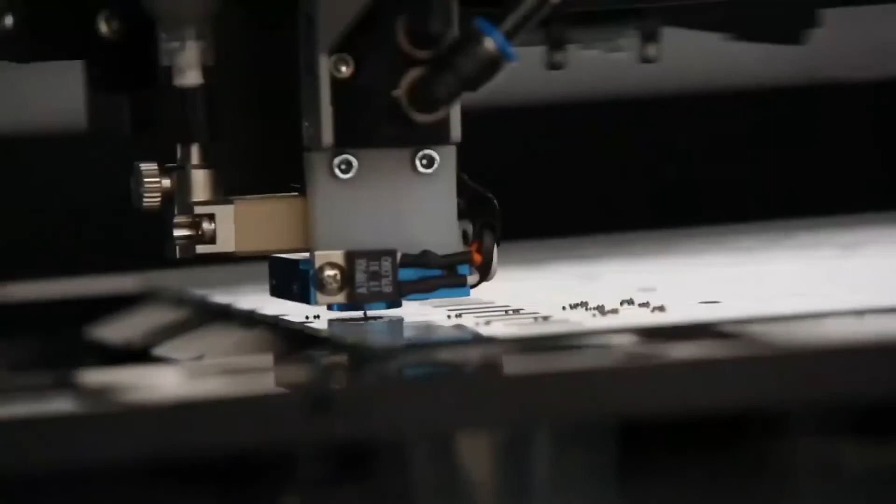That's artificial, isn't it? Okay, good.

And one last one is basically the so-called IMSE technology, which is a foil-based technology. On the bottom you can see a product example - that's basically in the car. No, I will drive here - oh, we're now in England, so it will be here, sorry, English is on the wrong side of the road, right? That's basically where you have the control panel for the lights and for the roof, etc.

Now in conventional technology on the left, you need - I can't read it, but I think it's 25 tools, I don't know how many parts to do it. And with this new technology, which I will show you in a second, it's basically one part, two tools, much lighter, much cheaper to produce.

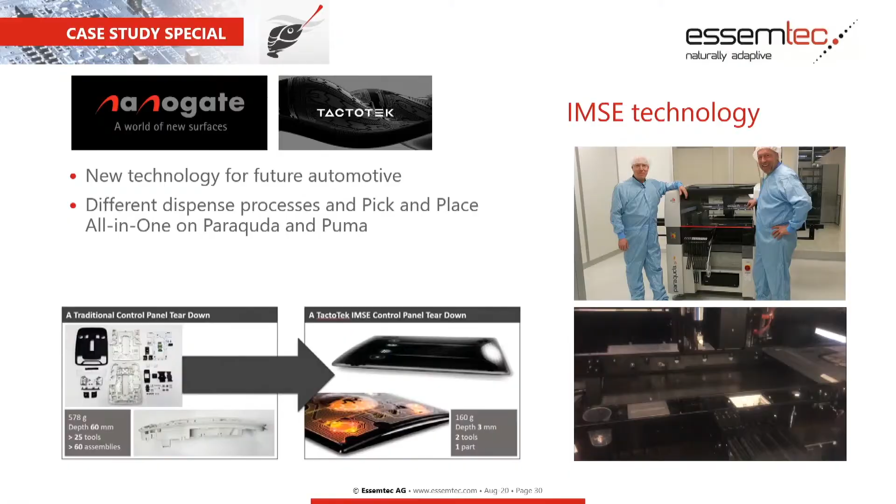I think we have a video here too. It's basically for car interior - in the future you'll see no steering wheel basically, no knobs anymore. It's all touch, slide, and motion control, motion recognition. And what it does, it brings an intelligent foil to the production.

Decoration on it, molded labeling film, print conductive for jet, actually conductive, pick and place, right? And then we have a 2D foil, and then it's a 3D shape in injection molding, and then the product is finished. It's very cool, it's a lot of function in this little flat foil.

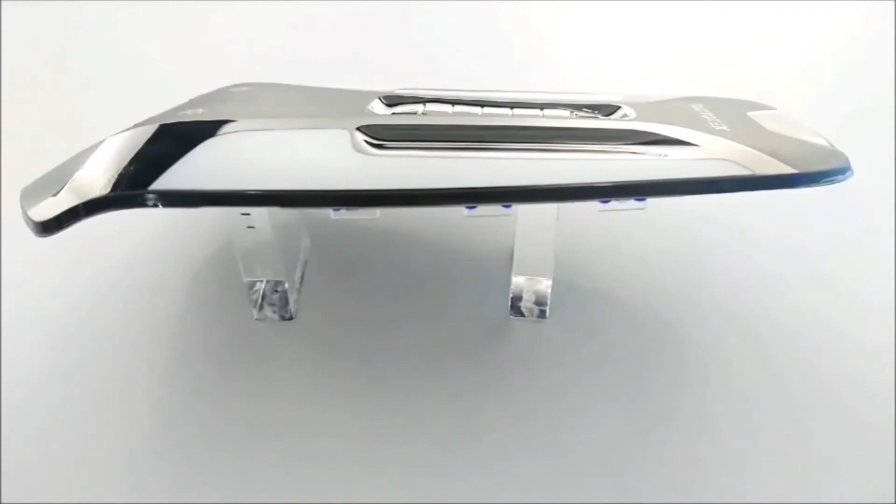And you can do all kinds of things - touch controls, antenna, LEDs, etc. And of course such a thing you can only produce in one machine with a jetting concept and the pick and place in the same machine.

All right, so that's basically it. So let's wrap it up.

Do we want to wrap up first, or do you have questions for me? I'm always getting very nervous in this situation. They're not that bad, okay.

Where can we get more information about your products, and where do I get help? You will not believe it, but as a high-tech company, we have a website: Essemtec, www.essemtec.com. Just go in there and have a look. When you have questions, click the info button, and we will get in contact.

Can we dispense solder paste and glue at the same time on the PCB? Yeah, we definitely can do this. Some people said, but then you have the solder oven, how does that work? I'm not a specialist, but think about matrix headlights, one of our big technologies. The process is all the same: you print the solder, then go into the jetter and glue dot every LED. The LED is then placed in the glue and solder so it's absolutely not moving, because on the matrix, every movement in the LED array will show.

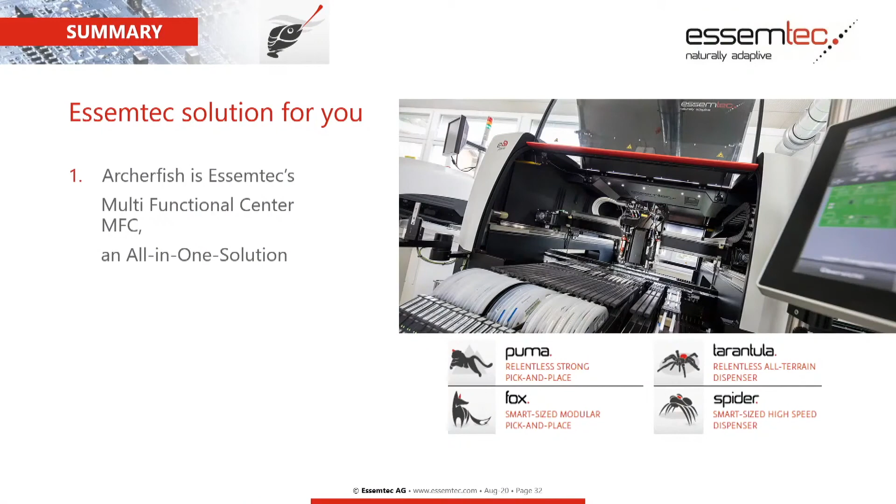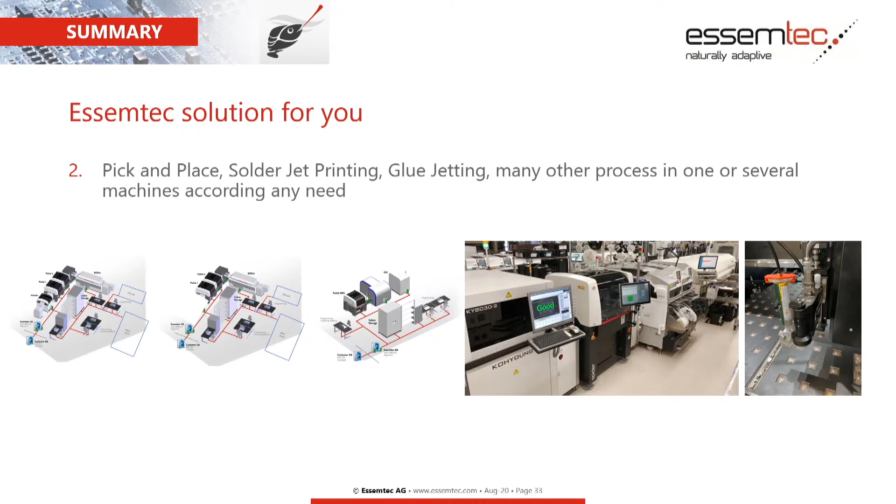Thank you, all right, let's wrap it up. Archerfish again, we call it a multifunctional center, an all-in-one solution with a lot of flexibility inside the machine and between the platforms. You can use it in a lot of applications. Clearly, a jetter will never be as fast as a printer, period. You have to figure out, or we figure out together with you, what's the best use: a combination, a standalone machine, or maybe it doesn't work at all. But there are a lot of possibilities for combinations. We have many different valves and a lot of experience in the processes.

I think we just delivered an underfill machine to Germany, and we have applications in Ireland. Aerogen is such a customer, which is medical, nothing to do with electronics—what we're doing there is basically mechanical. So the field is huge, and of course we have special applications and new technologies. We have a lot of customers who buy a pick and place and always integrate one axis for dispensing, because even if they don't need it now, they see that sooner or later they'll use dispensing. Just when they get one component that needs some glue, we have to do it somewhere—if you don't have anything on the machine, you have to do it by hand.

Good, I think that's it, isn't it? Anything else? If I were at the table with you, you could give me an answer, but now you can't, because you're behind the camera.